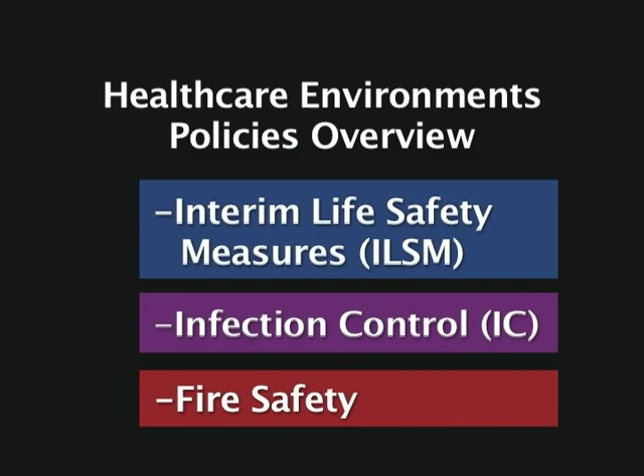The policies that affect construction in a healthcare environment include ILSM, or Interim Life Safety Measures, infection control, and fire safety. We're required to follow these policies to maintain a safe healthcare environment. We'll now review each of these policies in detail.

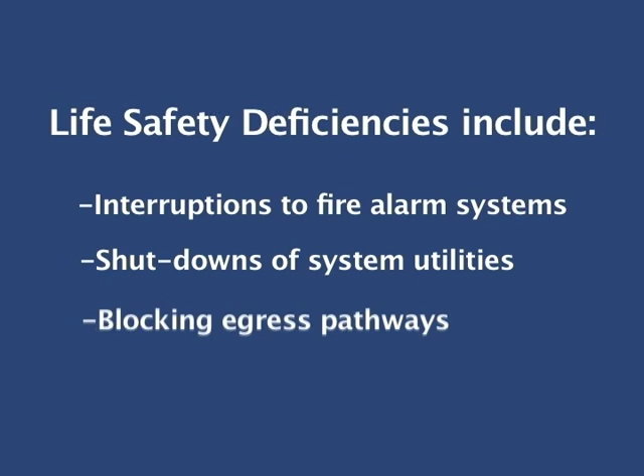ILSM Key Points. The purpose of the Interim Life Safety Measures policy is to help identify and plan for life safety deficiencies resulting from construction and determine temporary measures needed to maintain an acceptable minimum standard. Examples of life safety deficiencies that develop during construction: interruption to fire alarm systems, shutdowns or interruptions of system utilities, blocking egress pathways, and penetrations in fire-rated walls.

Prior to starting a project, a pre-job meeting is held to analyze the scope of the project and to determine what deficiencies, if any, need to be considered. This evaluation matrix outlines the interim life safety measures to be taken and is a planning and communication guide for staff and construction personnel.

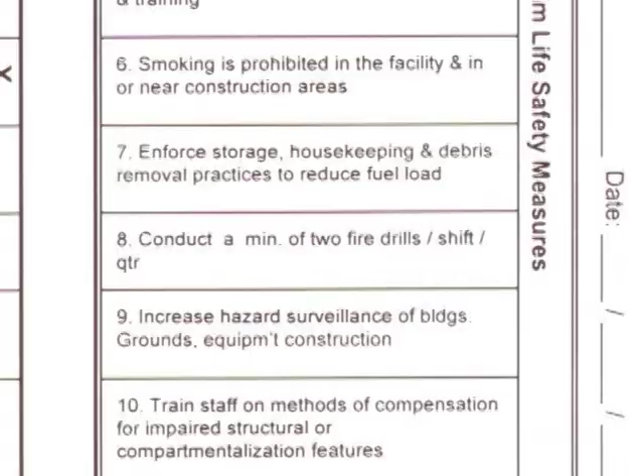Good communication is critical in keeping the hospital safe, and one of the best ways to communicate is through signage. Each project has an information sign at or near the entrance with information about the project. This signage helps keep staff and visitors informed and includes contact information in the event a problem should arise.

Many projects require the interruption of various utilities, and these must be properly coordinated to avoid unexpected service outages. If not planned and executed well, utility shutdowns can easily cause injury or death to patients. Some examples of systems that require formal utility shutdown approval include electrical, fire alarms, fire sprinklers, domestic water, heating or cooling water piping, air handlers, and sewer or waste piping.

When you need to shut down or tap into a utility, a shutdown permit must be filled out and submitted to the physical plant, which will authorize and schedule the shutdown. Andersen Construction will coordinate the shutdown between the subcontractor and the physical plant.

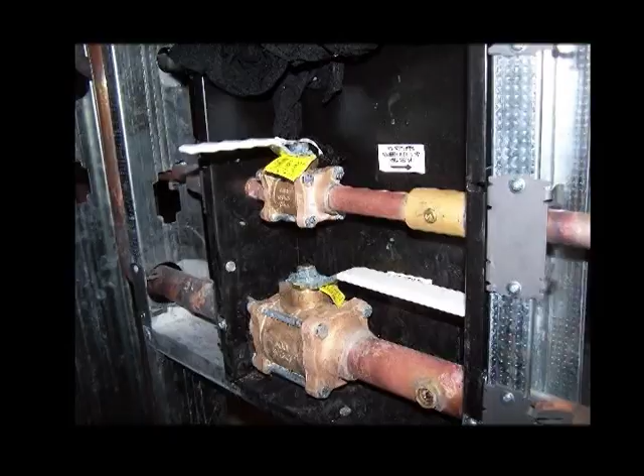Another requirement of the utility shutdown process is lockout-tagout. Lockout-tagout methods must be well planned so a facility engineer working in the area is aware of the shutdown. Systems that are temporarily shut down must be identified and labeled in the field. Re-energizing methods must be considered in the shutdown plan as well.

There are two things to always remember about medical gas systems. Never turn off any medical gas zone valves. That's always done by a facilities engineer. And always identify locations of medical gas lines prior to any demolition activity.

Access to emergency departments at hospitals must be maintained free and clear at all times. Any work activities that may impact access must be coordinated through Andersen Construction.

Fire prevention is a critical aspect of interim life safety. Fire extinguishers must be placed in the construction area and be current with annual certification and monthly inspection. Fire extinguishers must be at a minimum 10-pound ABC commercial grade fire extinguisher. Access to fire department connections must be free and clear at all times.

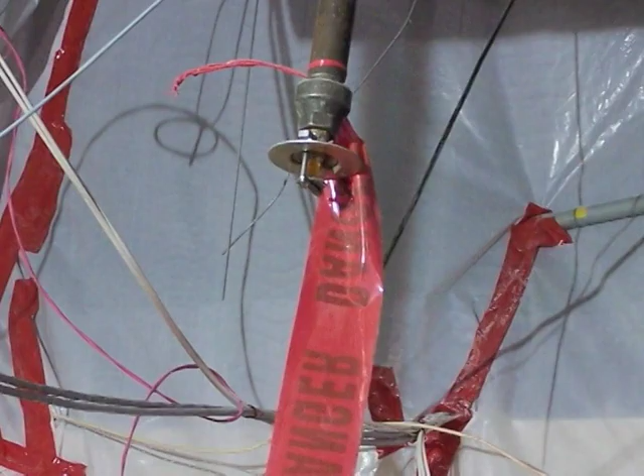Along with fire extinguishers, fire sprinkler systems will remain operational in remodel areas whenever possible. Fire and smoke detection shall be installed on a temporary basis when the facility system has been bypassed, shut down, or removed. Placement of temporary smoke detectors shall be coordinated with the construction project manager.

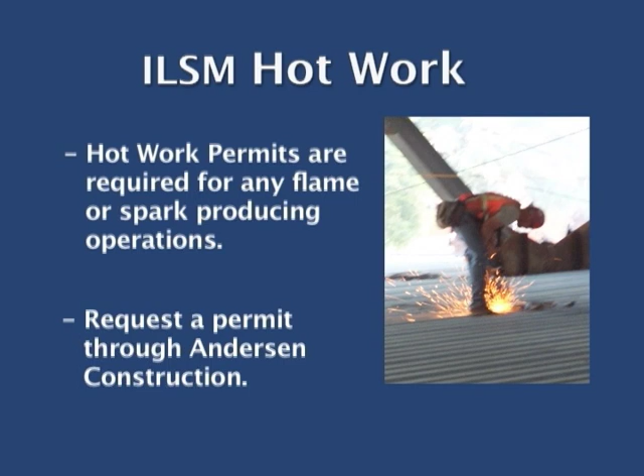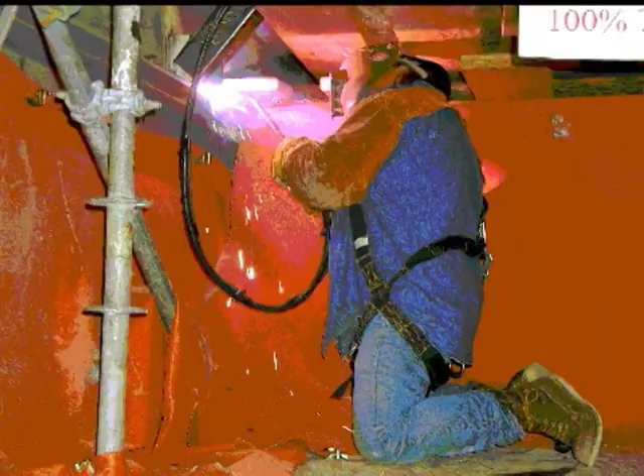Hot work permits are required for any flame or spark-producing operations. When a hot work permit is needed, it shall be requested through Andersen Construction so that proper planning and coordination with the facility takes place. Before starting hot work, a survey of the area must be conducted and all combustible material moved for a radius of 35 feet. If removal of the combustible materials is not practical, then the material or objects shall be protected.

In addition to hot work permits, fire watch must also be in place for any flame or spark-producing operations. Fire watch is to be by someone other than the tradesperson performing the hot work and must remain in place for a minimum of 30 minutes after all hot work is completed.

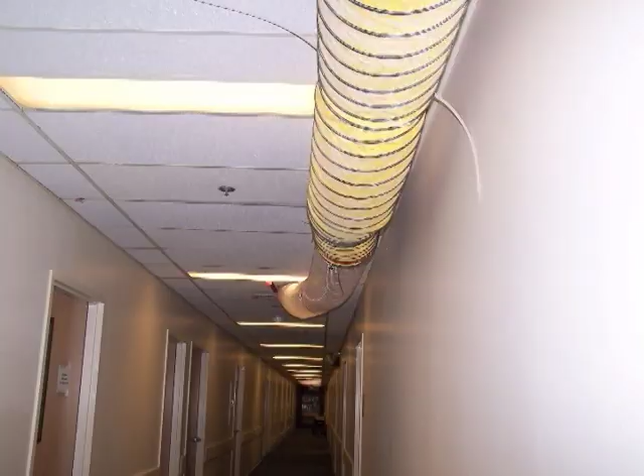When performing hot work, it is equally important to provide adequate methods for removal of smoke created in the construction process. This can be accomplished with smoke eaters or by direct venting to the outside. In either case, the smoke removal plan must be coordinated and approved by Andersen Construction prior to starting work. Hot work is not complete until the fire alarm system, if it was temporarily disabled, has been returned to normal operation.

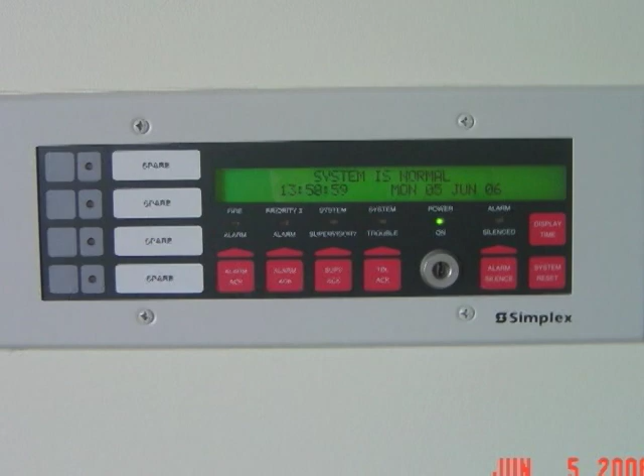Sometimes common sense is the best protection against fires. At the end of each shift, or when not in use, flammable paint or other flammable materials, including oily rags, must be stored in a certified flammable storage cabinet or container.

It is critical that housekeeping be maintained throughout the day in an occupied healthcare environment. In the event of an emergency, exitways, corridors, and stairwells all need to be kept clear. Never store any materials in a stairwell, underneath stairs, or in the area of rescue assistance. Also, never block open a fire-rated door or door that is equipped with an automatic closer. These must be allowed to freely close in case of fire.

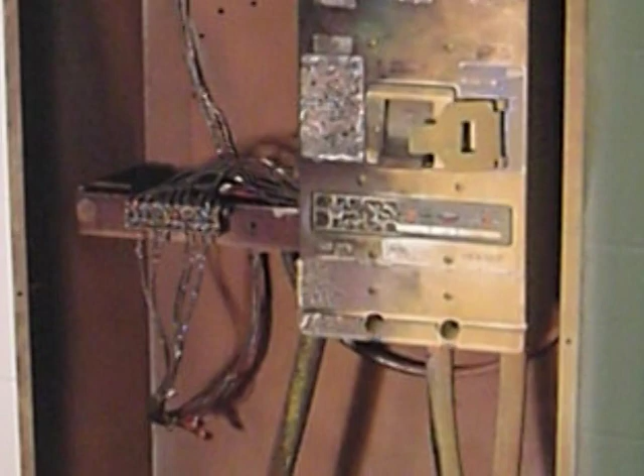Shorts in an electrical extension cord can cause fires after hours. Always disconnect electrical cords from wall outlets at the end of each shift. Visually inspect all power tools and cords prior to each shift. When using house power, a GFCI must be in place.

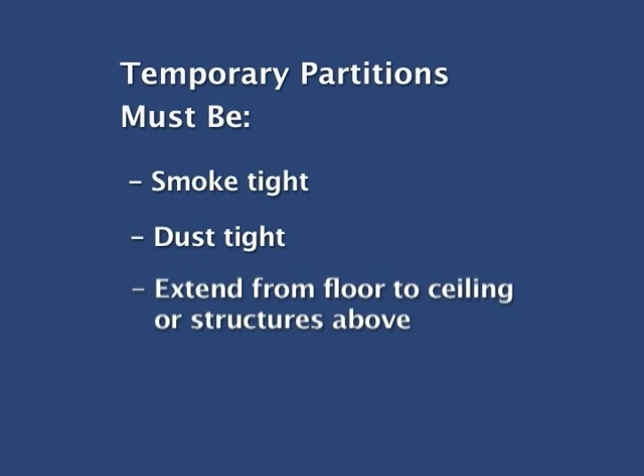Within healthcare facilities, construction activities must be separated from occupants. If this cannot occur, then an interim life safety measure must be implemented. Although the construction of temporary barriers can vary, all barriers must be smoke-tight, dust-tight, extend from floor to ceiling or structures above, and be constructed of non-flammable materials.

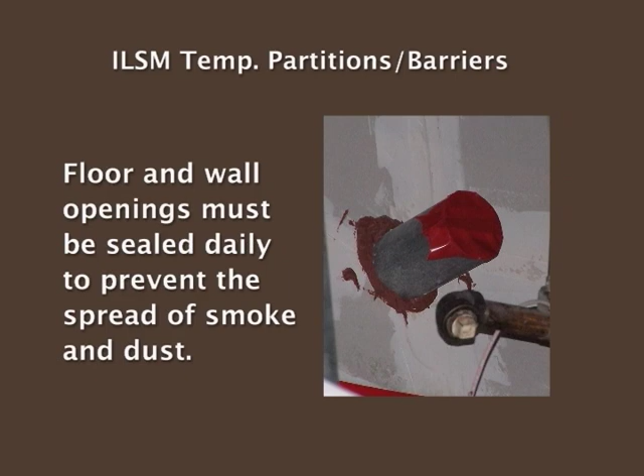It is also critical that all floor penetrations or wall penetrations and openings required to complete rough-in work be sealed daily to prevent the spread of dust and smoke. This ductwork is properly sealed with fire caulking.

Next, we will review infection control, which is known as the Environment of Care Policy. This establishes uniform procedures for assessing risks associated with demolition, construction, and renovation projects, and minimizes the impact of these activities on the patient care environment.

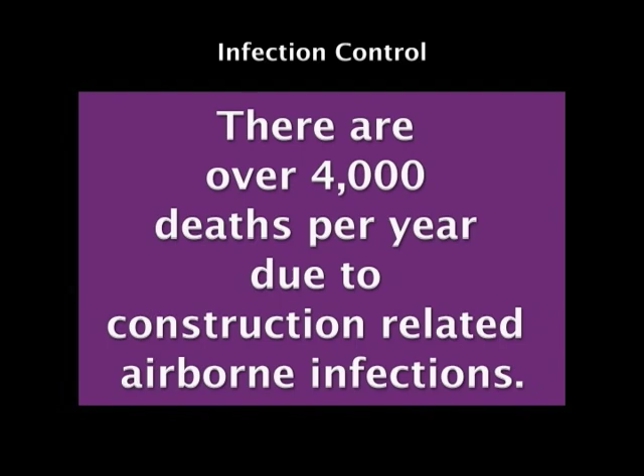So much attention is given to infection control because infections are a leading cause of death in hospitals. According to the American Society for Healthcare Engineering, there are over 4,000 deaths due to construction-related airborne infections per year, the equivalent of 4 commercial airliner crashes per month. Infection control is crucial.

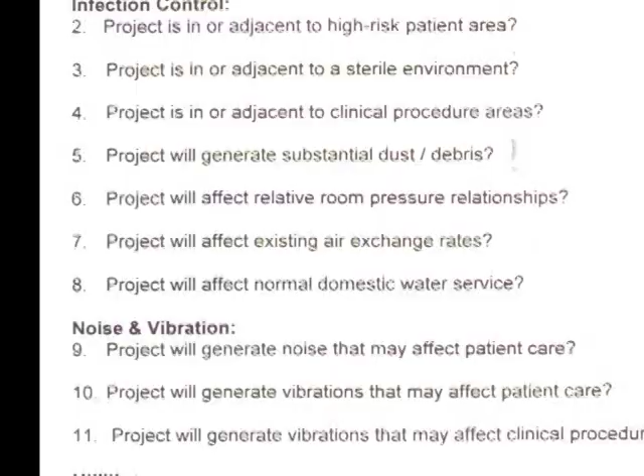Key components of infection control include the Project Risk Assessment, ILSM daily checklists, infection control measures, housekeeping, and communication between contractor and staff. Step 1 of the risk assessment process is to analyze the nature of the project, its proximity to other areas of the hospital, and consider the various risks the project may pose to occupied areas. These risk assessment checklists must be posted at the job site so that all personnel are aware of ILSM and infection control requirements.

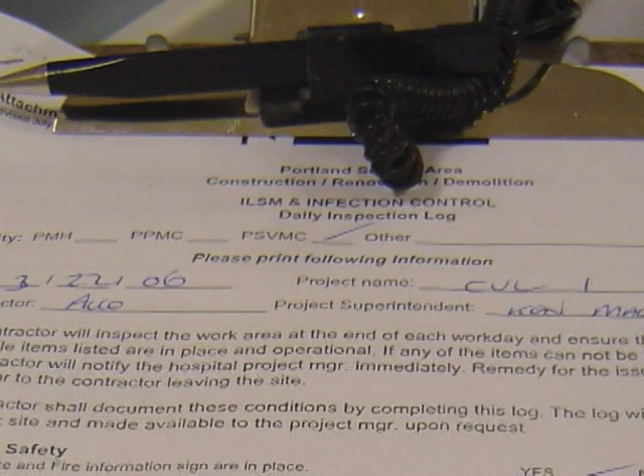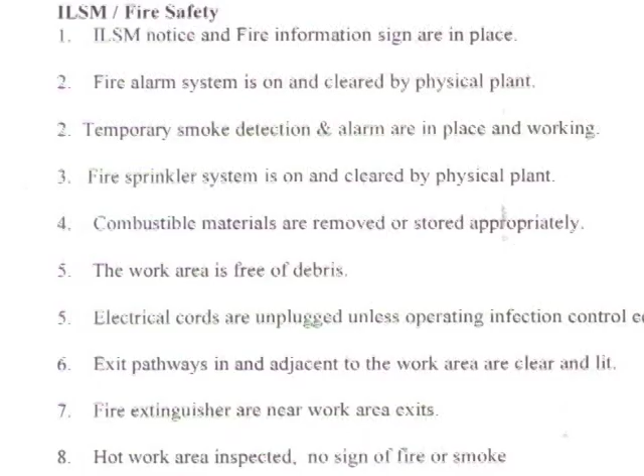Daily ILSM inspections are conducted by construction personnel at the end of each shift. All construction personnel should be familiar with these inspection items and report potential problems to a foreman or Andersen representative. These daily checklists are filed or posted in the project workspace and can be referenced by any employee at any time. It is critical that all personnel ensure their work practices comply with these requirements.

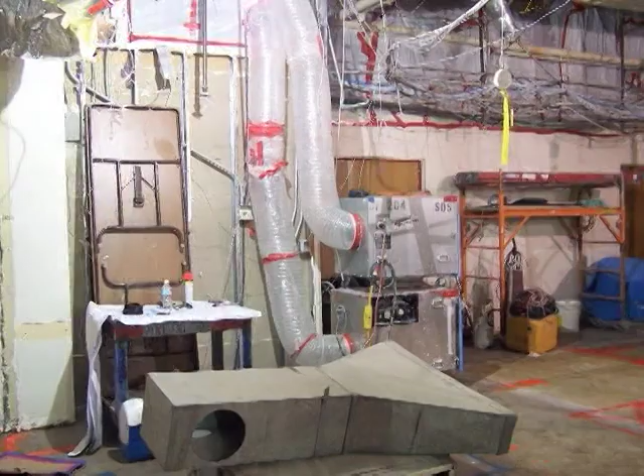One key element of containing dust generated by our work sites is to keep the area negative to the surrounding occupied corridors or spaces. Keeping the area negative means that the areas surrounding the workspace are pressurized and air is always flowing into the construction area, never out of it. This keeps dust contained and helps to eliminate the migration of dust through open doorways.

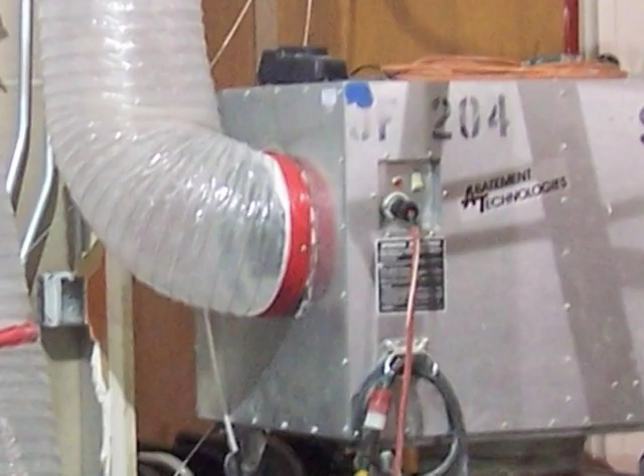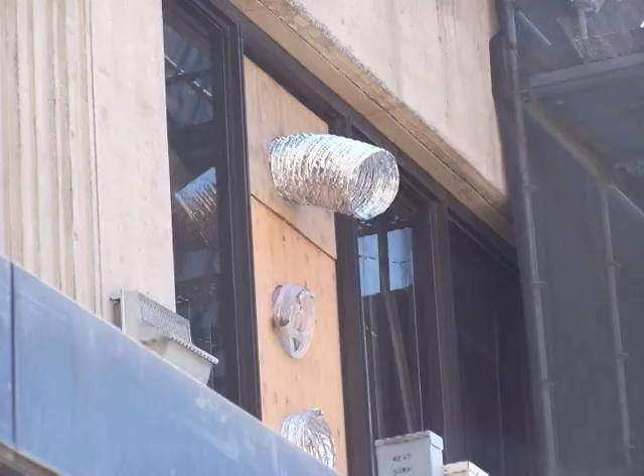The primary means of maintaining negative pressure inside remodel areas is through the use and maintenance of HEPA-filtered negative air machines. When negative air machines are used, the following criteria must be met. HEPA-filtered negative air machines must be vented directly outside or exhausted as approved by the facility construction manager, be properly maintained during work, have pre-filters and internal filters changed as needed, be left operating 24 hours a day throughout the duration of the project, and have intake and exhaust ports wrapped with visqueen and taped closed when moved outside of the work area.

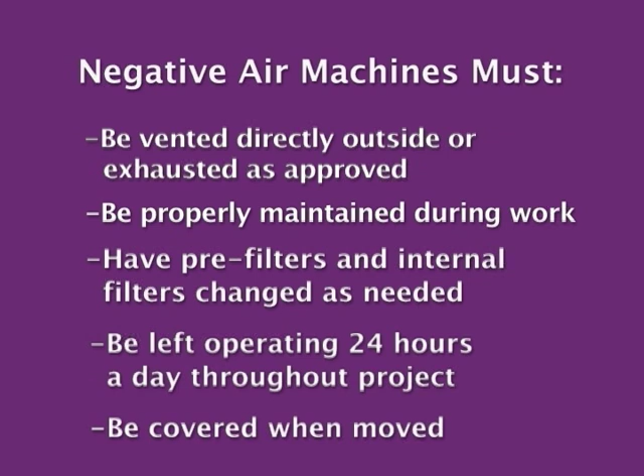Again, the best strategy for maintaining negative pressure for any given remodel situation will be planned and approved by the hospital construction manager. Usually, the plan includes temporary modifications to the existing HVAC distribution system. Common adjustments include closing or dampering shut the existing supply duct serving the remodel area and sealing all supply grills with plastic. On the return air system, grills are always filtered. In some cases, the return ductwork is dampered closed to eliminate the potential of contamination through the system.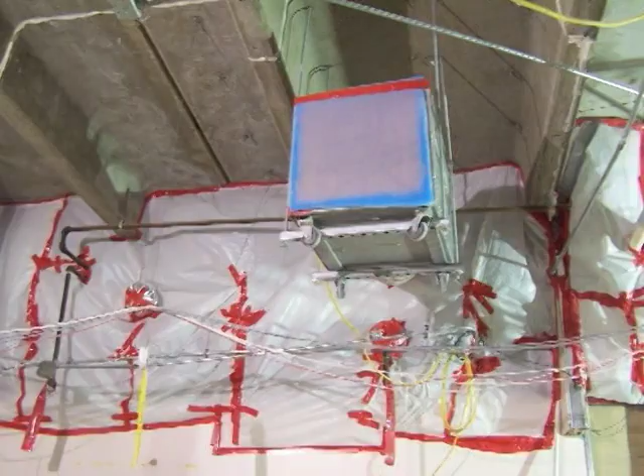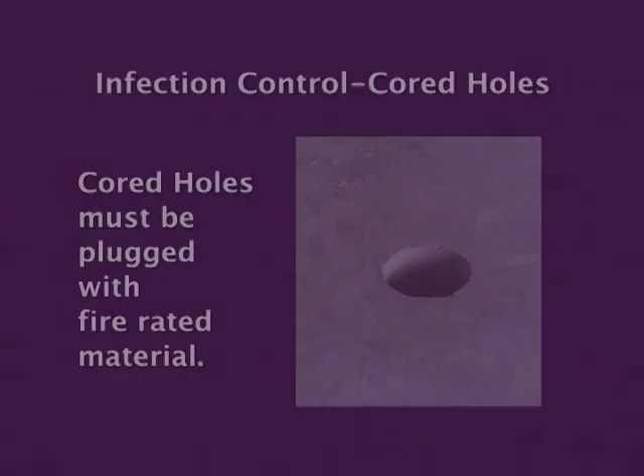Let's talk about interior construction boundaries and the types of openings that could allow dust to migrate into occupied areas. All unused doors along the construction boundary shall be taped and sealed. Wall openings between the construction space and adjacent areas shall be sealed to prevent passage of dust during construction activities. For example, when existing walls do not extend to structure, the space above the ceiling must be sealed. Cored holes in floor slabs must be protected to prevent falling dust or debris or injury to workers and must be sealed with a fire-rated assembly.

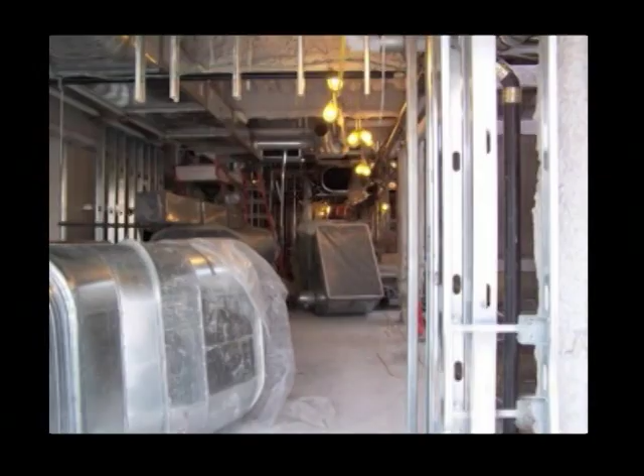Also important to infection control practices, HVAC systems play a critical role in controlling the spread of dust from construction. New HVAC equipment and ductwork must be protected from dust infiltration during construction as well. This requirement is typically satisfied by covering new ductwork with visqueen before it is installed and sealing open-ended sections until the next fitting or section is installed.

Sticky mats are another very important item used to prevent the spread of dust. Sticky mats are provided by Andersen Construction, but we need your help to keep them fresh throughout the day. Sticky mats are placed at entrances and exits to occupied areas. It is crucial that all personnel and wheeled carts cross the sticky mats prior to exiting.

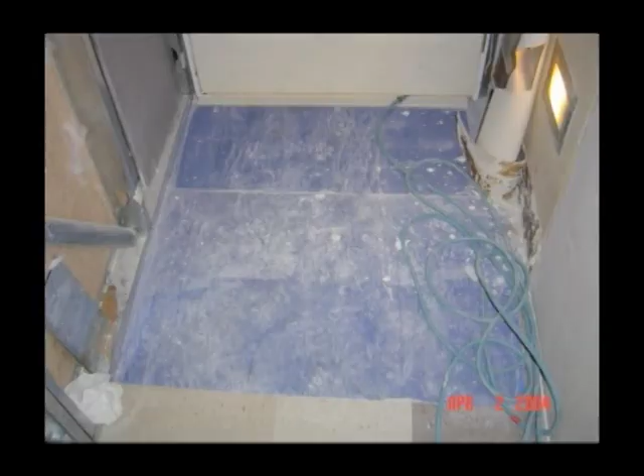Sticky mats can become trip hazards if not installed properly. Again, the mats must be changed regularly or they become useless. Here's an example of sticky mats not being maintained properly. And here's a good example of properly installed mats being maintained on a regular basis.

Obviously, we have to get materials and debris in and out of the construction areas. When transporting materials, carts must be tightly sealed and covered with a damp, clean sheet. Tool carts must also be covered with a clean, damp sheet. This keeps any dust contained until the carts can be uncovered in a safe area.

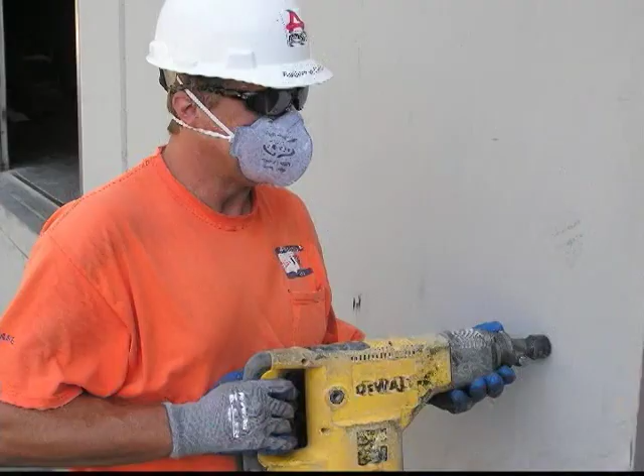We've talked a lot about protecting patients from dust, but protecting ourselves from job hazards and the biological hazards inherent at a hospital are equally important. Construction workers are encouraged to wear gloves, face shields, or masks, and are encouraged to wash their hands and face with soap and water throughout the day.

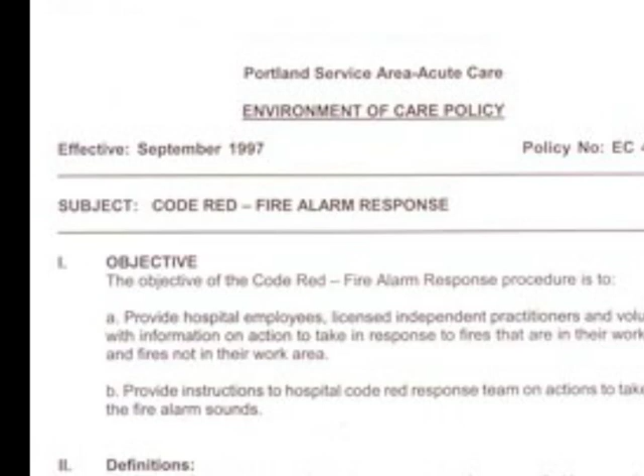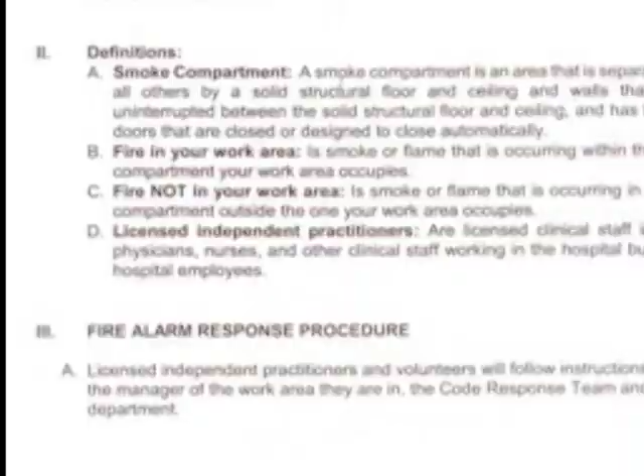The last topic to discuss is the hospital's Code Red policy. The purpose of the Code Red fire alarm response policy is to provide personnel working or volunteering within the hospital with information on the action or actions to take in response to fires in and outside of their work areas. Fire presents a unique risk in hospitals and patients cannot always evacuate.

If at any time a contractor observes a fire or hears a Code Red announced, they should use RACE to respond. R: Rescue anyone in immediate danger. A: Alarm. Pull firebox and call for help. C: Confine, close doors, windows, and chutes. E: Extinguish if small fire, evacuate if necessary.

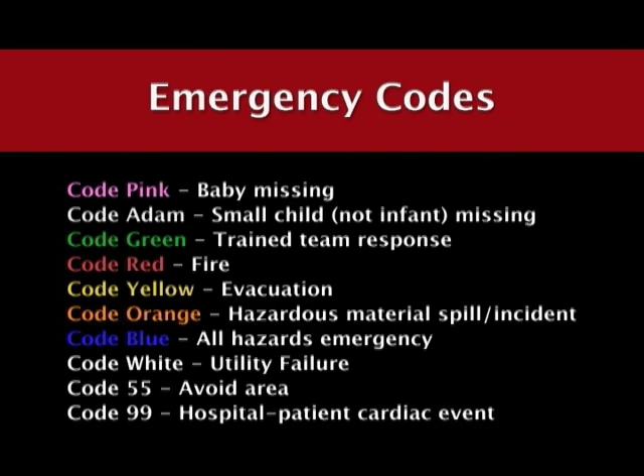Hospitals use many other overhead paging codes in addition to Code Red to communicate various emergency situations. All construction personnel need to be familiar with these codes and know how to respond accordingly. When a code is announced, listen to the type and location. In most cases, there will be no action necessary by contractors, but it is important to be alert as hospital response teams may need immediate access in or near your work area. You may simply need to get out of the way or remain clear from the emergency area.

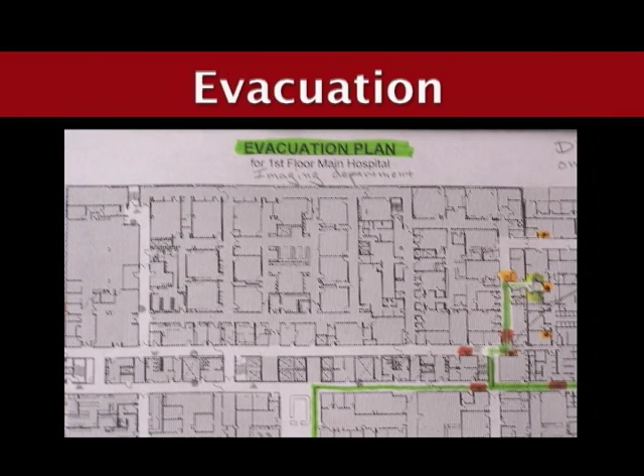If there is an emergency, it is critical that you know the primary and secondary evacuation routes and meeting places. In this situation, remain on site at the designated meeting place until a head count has been conducted and an all clear has been announced. Evacuation routes and meeting places are determined at the initiation of each project and reviewed in weekly site safety meetings.

In general, the hospital is a non-smoking facility. However, there are designated smoking areas outside. Smoking in areas that are not designated for smoking will result in the removal of that employee from this site. The Andersen staff can provide a site map identifying the approved smoking areas.

We need everyone's help to keep this hospital a safe place for patients to heal. From electricians to framers, delivery drivers, and cabinet builders, everyone working on this site is responsible for the safety of the campus, its staff, visitors, and of course, the patients. So pay close attention to what's around you, be creative in finding ways to protect occupied areas, communicate health and safety concerns, and remember, you're in a hospital. It will take the efforts of all to successfully complete work in the hospital safely. We need to work together to follow the policies outlined here.

Now that you've watched the video, please proceed with the written test provided by Andersen's on-site staff. Take your time and feel free to ask questions of the Andersen staff. We encourage discussion as needed to ensure you're comfortable with the requirements.